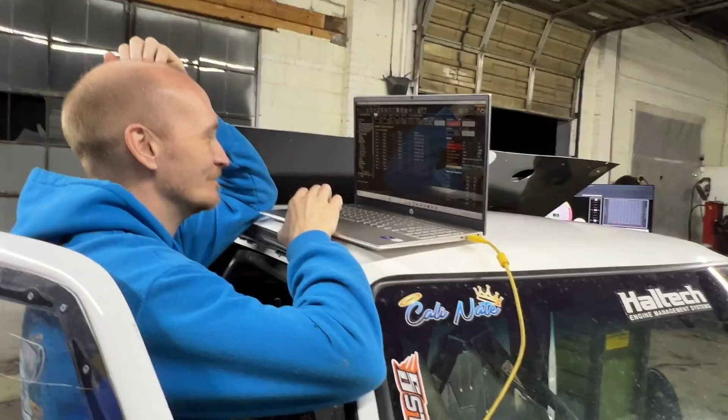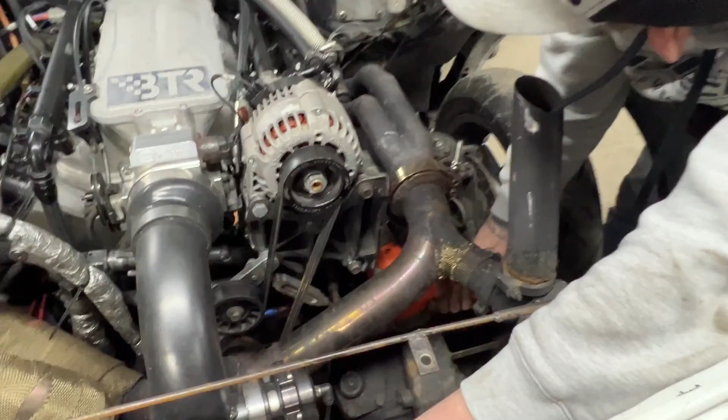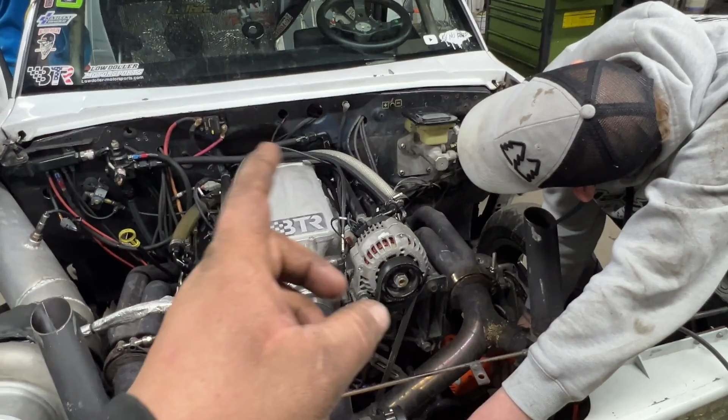So you can't tune if you don't know what hole is what hole. You gotta know your holes. Trust me. We got a heat gun on here, and we're just running down the line and verifying with what it changes over there, just to make sure, because a minute ago 1 and 8 were the only two that I had right, and I think these were flipped. 7 was 2, I think. I'm not for sure, but I had them all over the place. And you can't do a cylinder correction with temperature and with injectors, with the fueling, if you don't have it in the right spot.

With all that being said, we are at Carbon. We've got Brad down here and Corey. Steven will be here shortly. I know y'all have seen Austin before. We've got new EGTs on it. We got the new injectors in it. We've got basically a whole new truck again.

Same headlights. Got the same headlights and the same busted windshield. It's cracked right there. All the way. Yeah. Yep. Clay City, Kentucky Dragway. Every time I go down there, I tear something up. So hopefully that's behind us by now.

So, anyways, we are hopefully going to make power tonight. Big power. So stick around for that. We've made one short pull on wastegate and didn't even make the recording on the dyno. That was my fault. I didn't hit the button, and I thought I did. But that also showed us that we needed to verify the EGTs for what hole is what.

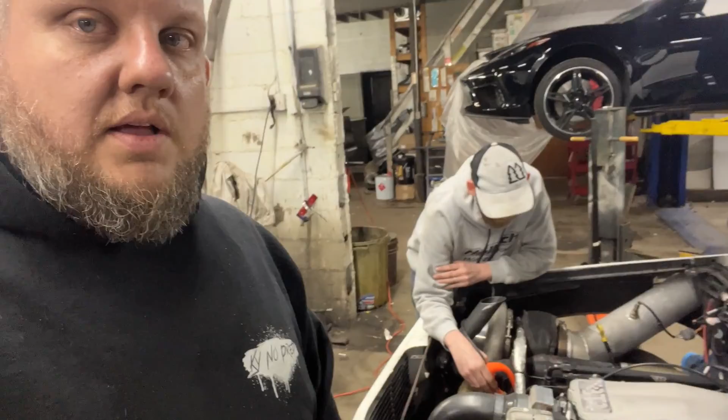Now we can really do the corrections that we need to do and make the power that we want to make. I'm not going to tell you what we're going to shoot for, but it is north of where we've made before. I know what I want to see. We all know what we want to see happen tonight, but we're not going to put numbers out there yet until it happens. We're gonna let Corey do his thing with Brad, and we'll get right at it.

We've done some cylinder corrections by now. We've been on 4 pounds, I think is what it is. We've made like 450, something in that range. We're gonna rev it on up a little bit. We've got it on a 10-pound target. It may be 8 pounds, maybe 11. We'll figure that out after this pull. But cylinder corrections and a 10-pound target is where we're at. Let's get it.

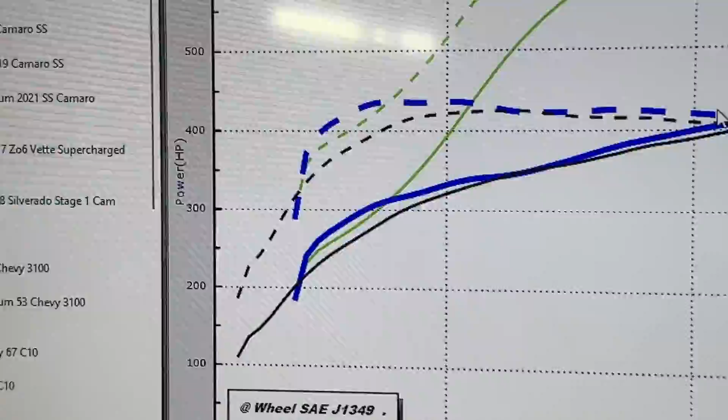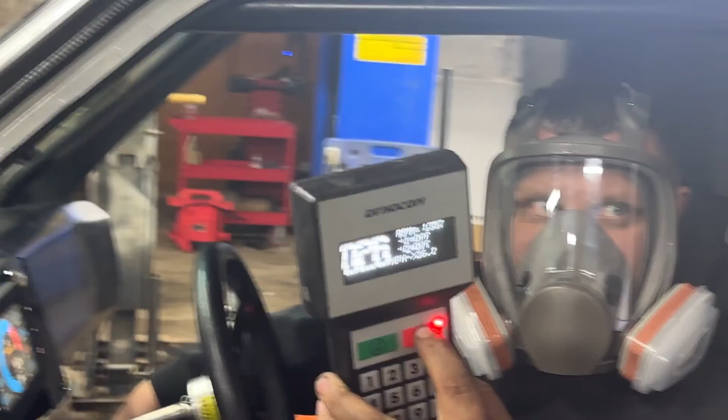So we're happy with it. It's picking up fairly good. We done a little bit more fueling change. Did we add any more timing or no? No, we didn't add any more timing, right, Brad? Brad, he's not paying attention. Do we add any more timing? No. Just fuel, right? Yeah, just fuel correction, fuel boost. So it should be on 15 pounds this run. 15 pounds it is. I know you won't even look at it.

So we went up boost, we got a 15-pound target, so we're hoping that everything is linear, and it makes right at 15. We got a new plug on the hottest cylinder, so we're going to pull that plug after this run. We're going to show you guys what about 15 pounds does, and whatever power it makes, we'll let you know that too. Go.

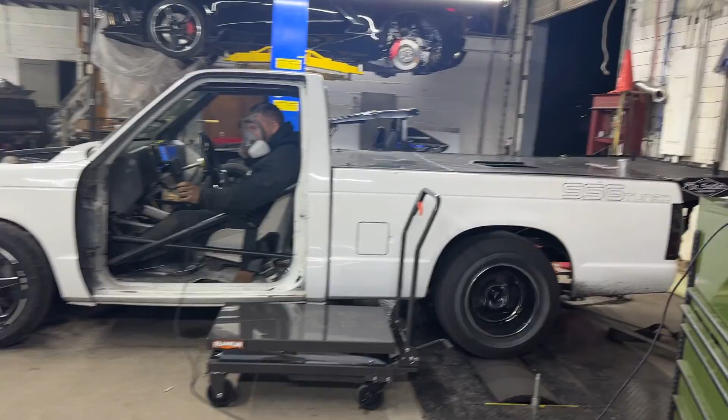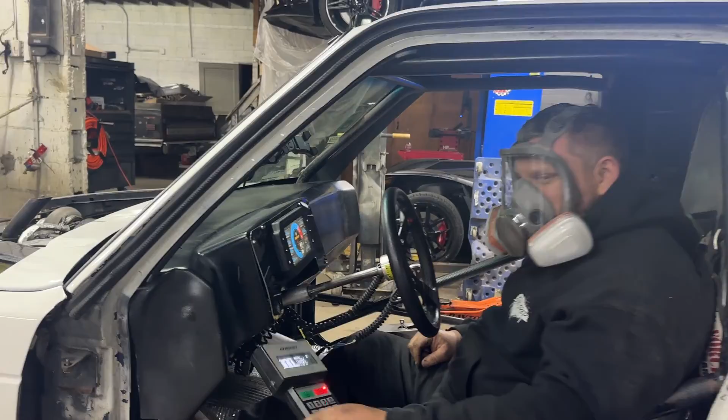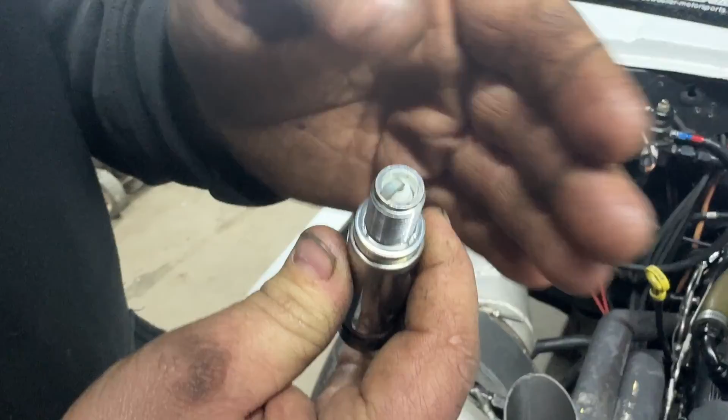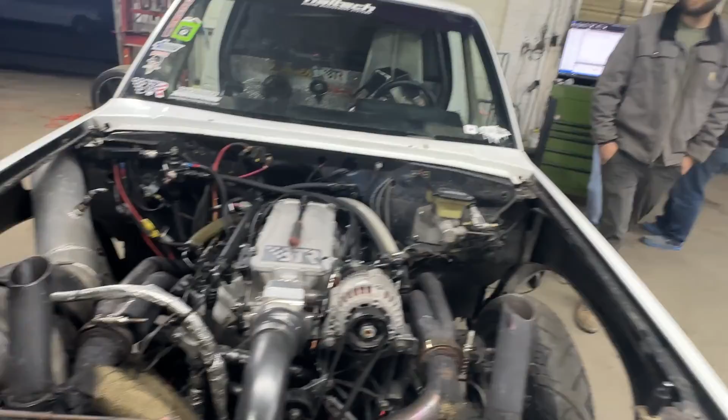So I haven't myself even looked to see how much power it made. First thing I did was look at the plug. I don't know if y'all can see that. Is it focused? Yeah. So that was just one pull, and obviously the timing's safe, fueling's safe. It isn't hot enough to even burn all the cadmium off or anything yet. So we're super happy with that. You can see, if you know what you're looking at, it's fine. Now you can go over there and see what power it made, what boost it made. Swap out that O2 again. Still a little bit cold on one.

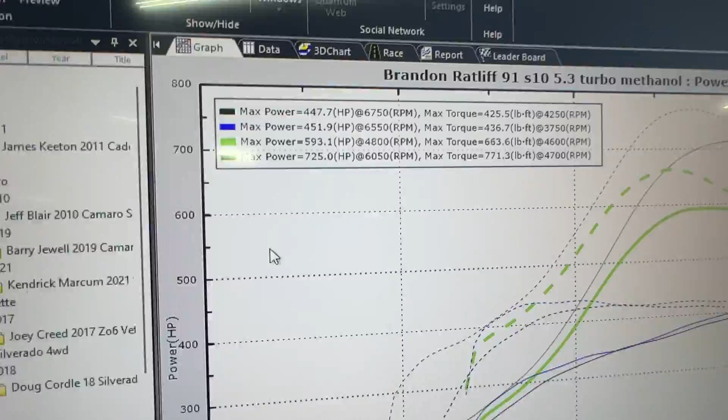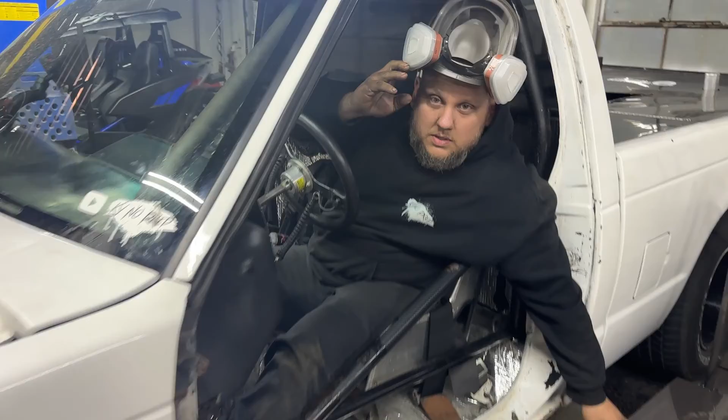All right. So we are going on up to 20 pounds. We still have like 8 degrees of timing pulled out from where we know we were before. The timing looks great at the power level we're at. We're going to run 20 pounds, see what it makes, look at that plug, and then we're going to start trickling the timing back in it from here and see where we need to go. We know we can add more timing, we just don't know how much. We're going to watch the power trend throughout the next few pulls to figure out where we need to stop and be safe. You got anything you want to say?

Yep. We're also on NGK 10s this time. I think when we were here last time, we were on 8s, right? Yeah, we were on the NGK 8 the last time we were here. So we're on new plugs. It's on 10s instead of 8s. And yeah, everything else has changed, so why not change all that too? Yeah, we've changed it all. So, yeah, let's get it.

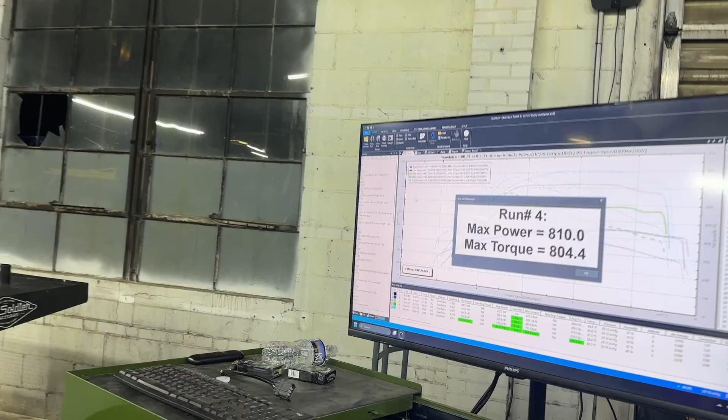And 804. 810, 804. No. How do you feel here? You're not good? Yeah. Sounds good.

So what we're going to try to do is same boost. So we're going to try to stick around 20 pounds. Probably going to add about 100 degrees worth of temperature to the EGTs and see what kind of power that picks up. I would expect 50 horsepower or something like that, about every 100. But we'll try it to see how it goes. Sounds good.

Timing up top only, around 6,000 up in that range. Yeah. We pulled 2.5% of fuel out of it as well, trying to clean that up. We did gain almost 100 degrees EGTs. Plugs look good so far. We got another plug in number 1. We're gonna read that one after this pull.

What was the power in the last pull? It gained 70 horsepower with about a 75 or 80 degree average gain all over. Okay. So we're trying to gain that much more temperature while cleaning the fuel up at the same time. So if this works out, on the same boost we'll pick up another 70 or 80 horsepower. Yeah. Give or take. Or 50. All right, let's get it. Yep.

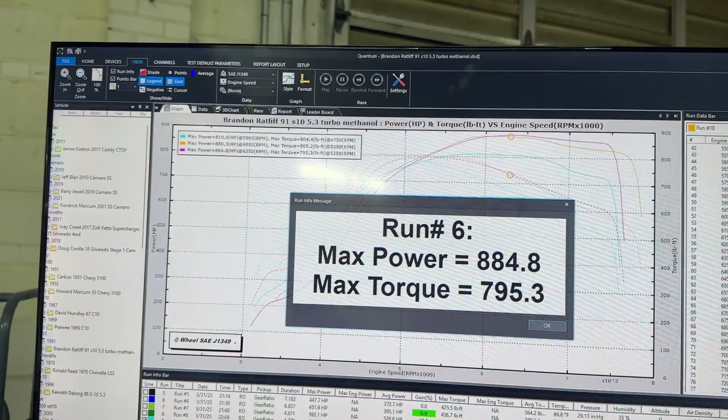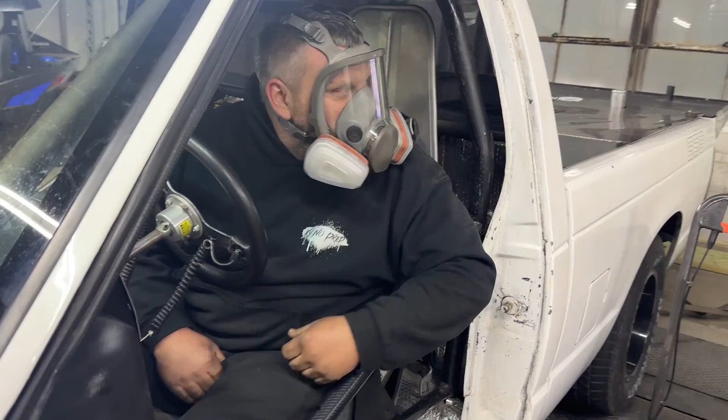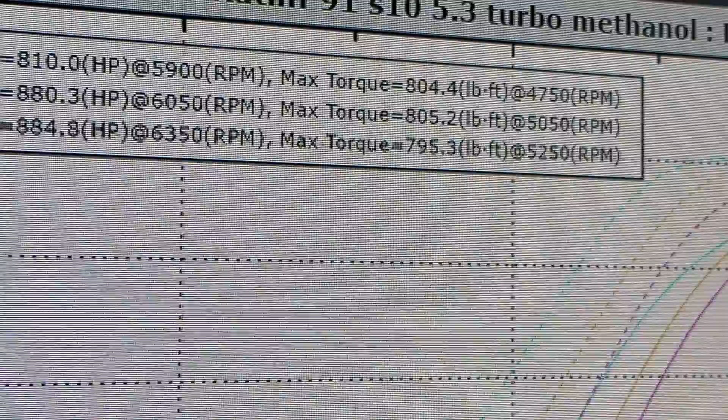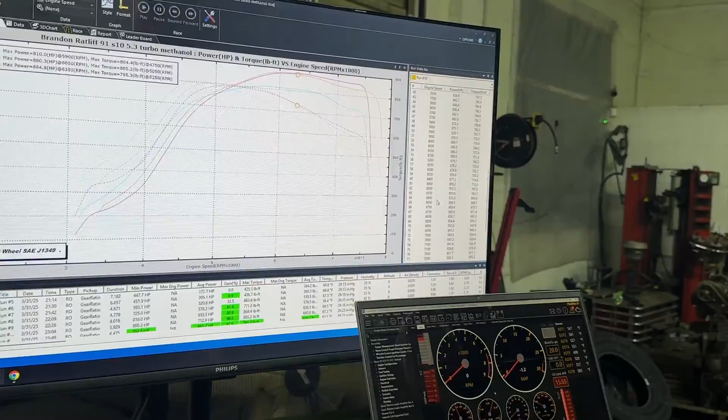That was a good pull. 884, I think. Run, Corey. Looks good. Nothing flat. Sweet.

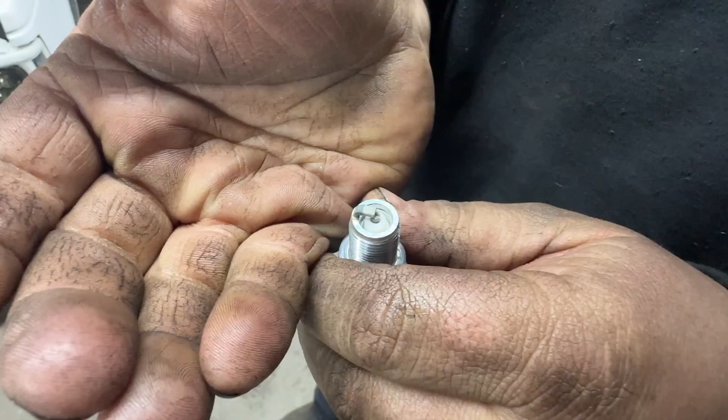So this is number 1. Been at 370, 380 on mine. I don't know if it's focusing for you. Quit moving. Oh, it looks good. It's great. There's really nothing burnt, nothing like that. Timing mark's still safe. Fueling down there looks great. This was number 1, which was still a coated cylinder. Here, let's go over and look at it exactly.

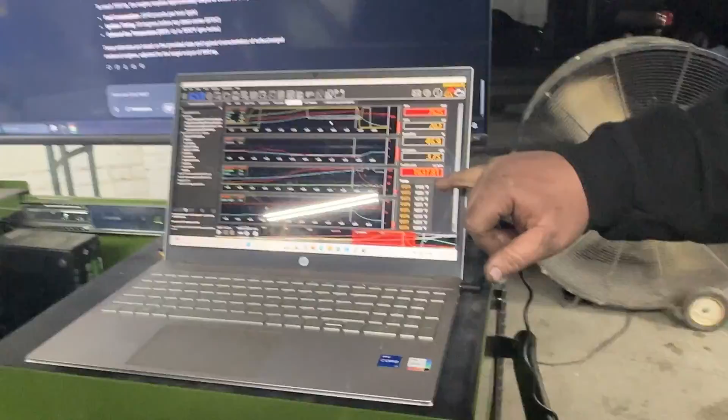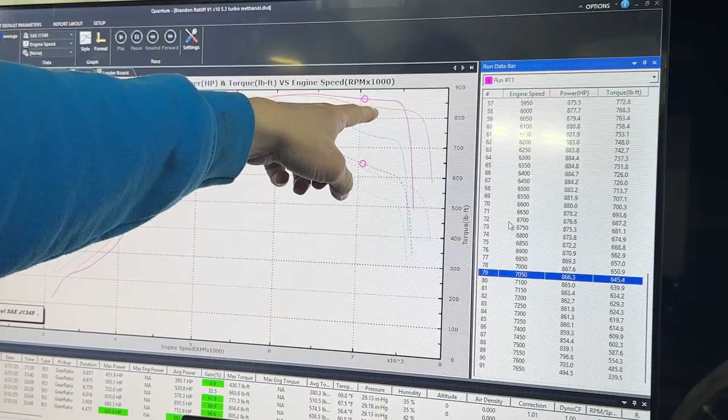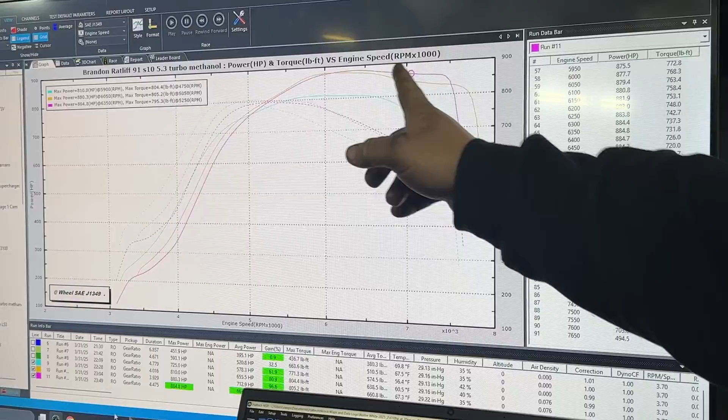But what we didn't tell you yet was when we added the 1 degree of timing, it also knocked a pound of boost out of it. Anytime you add timing and the boost lowers, it's getting happier. If we add timing and it doesn't drop boost, that's when you really got to start worrying. Picked up 50 at the end. So it picked up 50 horsepower.

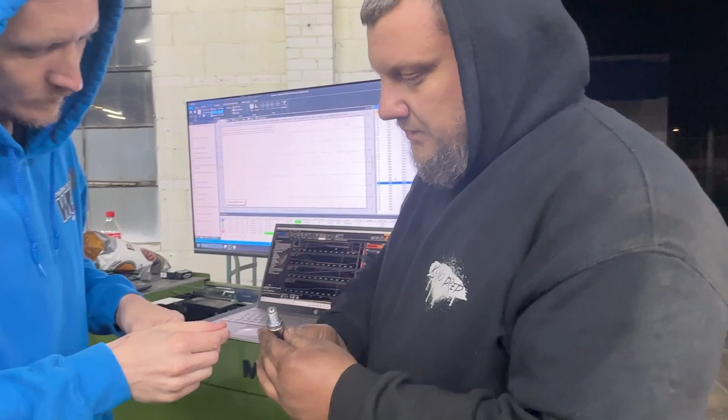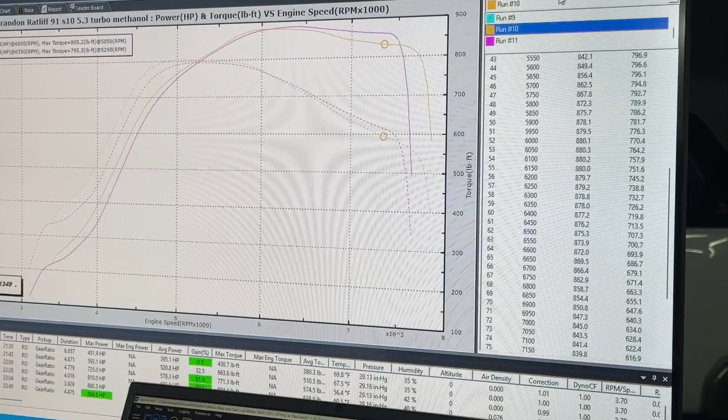Is that 8 still? This is number 1. Oh, that's 1? This is 1. Yeah, we're safe. So it picked up 20 then. Because we went from basically 870 to 880. No, we're actually from more than that, eh? He's computing. 845. No, let's look at 7700. Let's see now on here.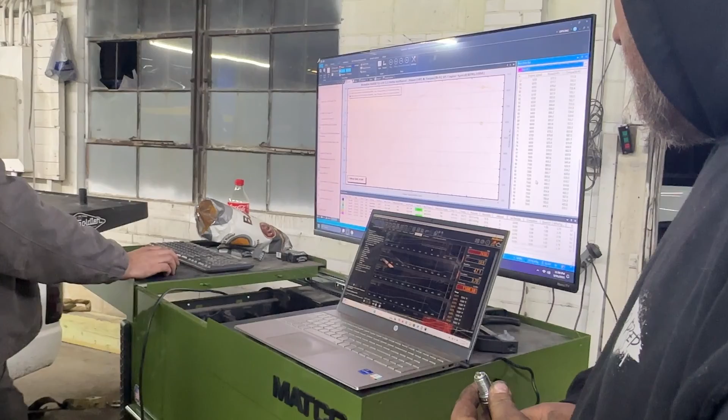That's where it made its biggest gap. So 7350 at 831, and 7350 at 860. So it picked up 30 wheel horsepower, and the only thing we did was 1 degree of timing, and we pulled a little bit of fuel out of it, which isn't a lot at all. Very little. We can still pull more fuel if we want. We can, yeah. We're still under 1,300.

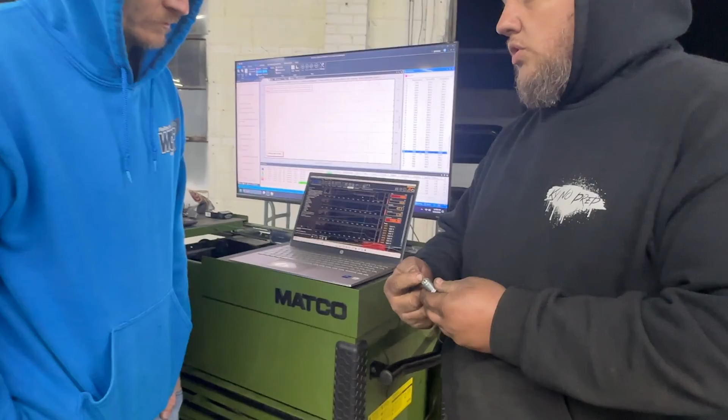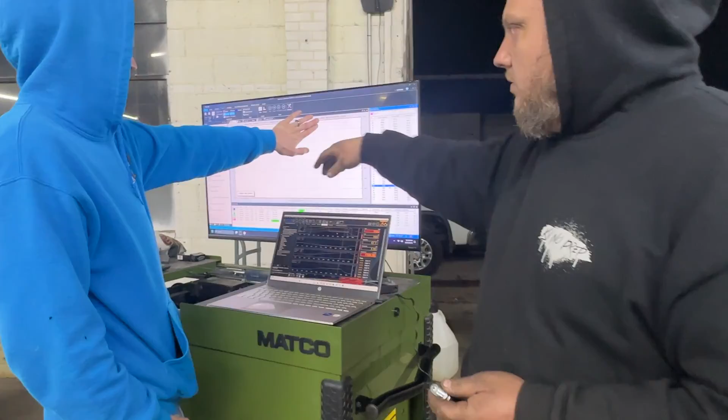I would like to see one more degree and see the change. Okay. If we don't change fuel and we do just the degree of timing, just let it eat it and see what it does. Yeah, I'm fine with that. That's what we're gonna do. One more degree, and we're probably still only gonna be working from here up. It's probably not going to do much here, and the peak numbers probably aren't going to be hugely different, but we're just trying to get this flat.

We're just cleaning it up, and then if we can get another good pull, I think we just slam another 5 pounds of boost in it. Yep. So we'll make another pull at this same boost, and add one more degree. Pull this plug again, and if it looks good, we might not even show you. We'll go straight to the 25 after that. So let's go.

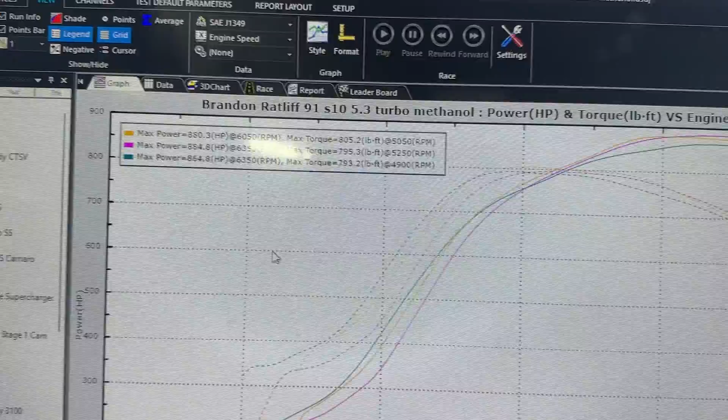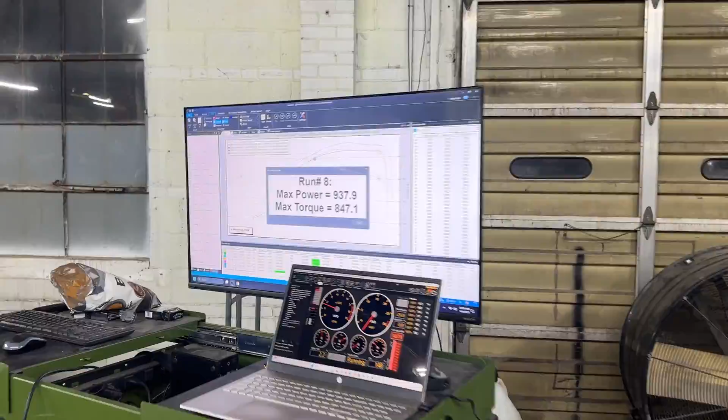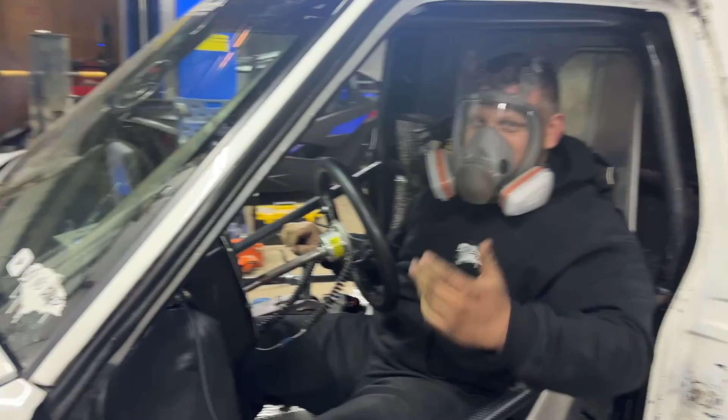So we added a little bit of fuel back. We took away one more degree of timing from where we were at because it didn't really like it. We're getting there. 937 and 847. Is it burning you out? No, no. So we're getting there. We'll let it cool down for just a second, pull them plugs, check the EGTs, check everything out. We may pull fuel, we may add fuel, we may play with the timing a little bit, and then depending on what happens now, we'll step it on up. So we're not done yet.

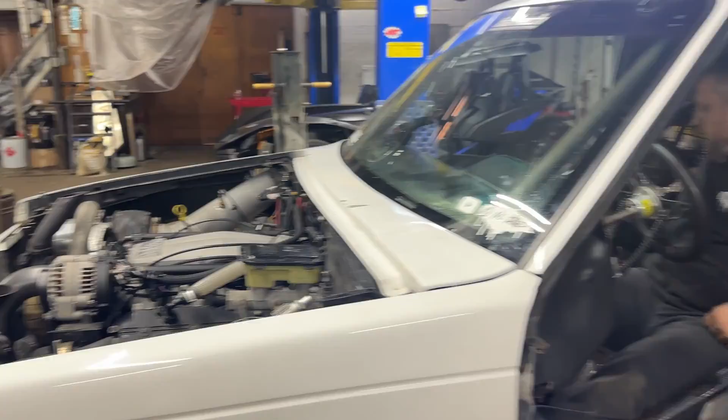What did it say, 28? It was actually not 25 pounds. Yeah, right there, 23 pound max. That's just on the log screen. He hasn't got all the data pulled up yet. He's chit chatting and nerding out over here. But it did make more power, obviously, with more boost. 23 pound max. Right there, we're at 937 going by, so 938 for max. He's going to pull this up and see if it was just a peak number, but it looks like a pretty good average. It did average a lot over the whole curve.

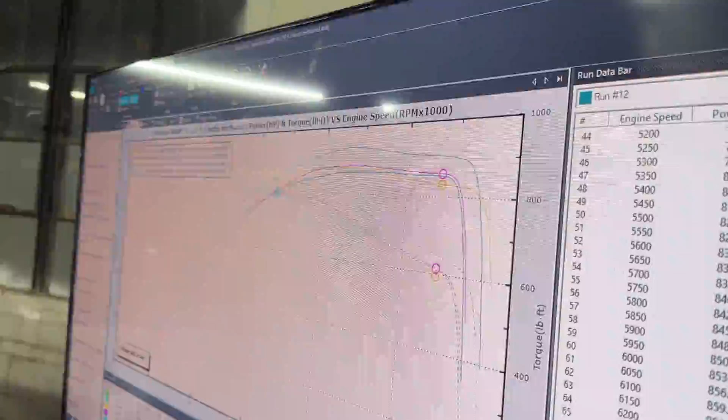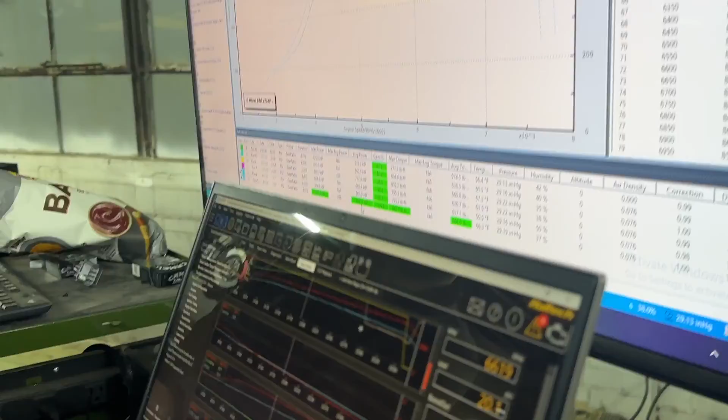That's a pretty good jump. Where's the average screen down here? Average about another 30 more horsepower, 60 more foot-pounds torque. Okay, and all the EGTs are between 1220, 1270, 1280 at the max. So we've got basically a 50-degree window. We know for a fact if we can take this thing to 1350, it will make a lot more power. It'll also be more on the ragged edge of blowing head gaskets and being very mean to it.

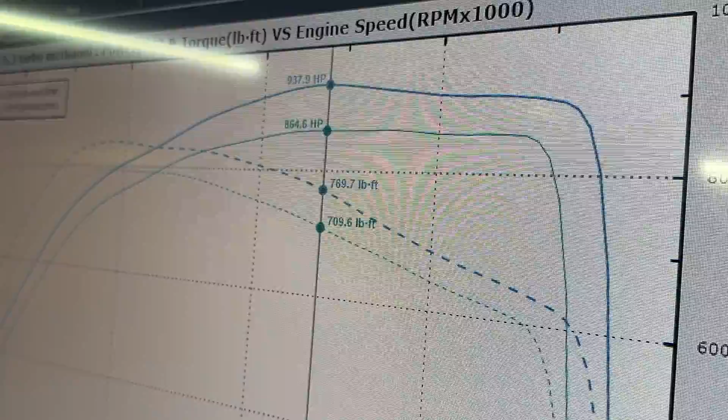I would rather it live at 1,000 to 1,100 all year long than to come out here and be a dyno queen and make 11 something or 12, which I want it to do, but I would rather it make a good strong average and live forever than throw a giant number on the screen and blow up tomorrow. He's got an average pulled up right quick. So we're still nerding out over here. These guys, they're all about their data. They got more stuff here than we could even talk about, honestly, going on behind this screen.

What is the next move, Brad? What do you want to do? Well, basically from here, we'll pull the plugs, just peek at them real quick. We know the temperatures on all of them, but I want to look at the timing number at that boost. We need to go in and add some duty cycle and boost control and see if we can get it to jam on up. We need to get that other 2 pound in order to make the 25 we were looking for.

Yeah, because that was 20 at 6,500, and then 23 when it revved out to 7,500. So at peak power, it was only on 20 pounds, and the 23 on out the back didn't trend high. So we just need to throw some more at it. Throw duty cycle at it, and we'll pull this plug, make sure the timing still looks happy with an extra pound or two. And we'll get at it with another pull at hopefully 25 pounds on the next one. See you in a minute.

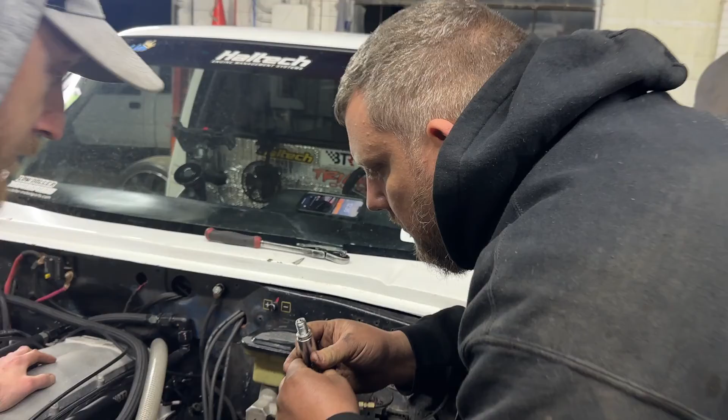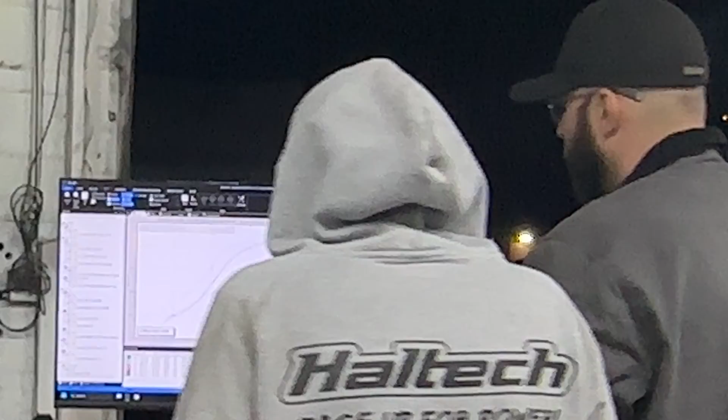What we got? That is beautiful. Barely getting a little color, about a third of the plug. Fuel ring down there looks beautiful. Just right at the top of the bend. I'm completely satisfied with that. It's perfect. Safe, still good and safe. Number 1 and number 8 should look the same. And number 1 and number 8 are the furthest apart from each other on what they want.

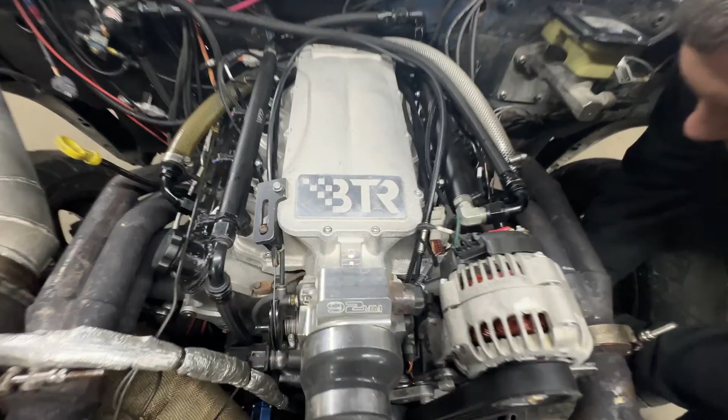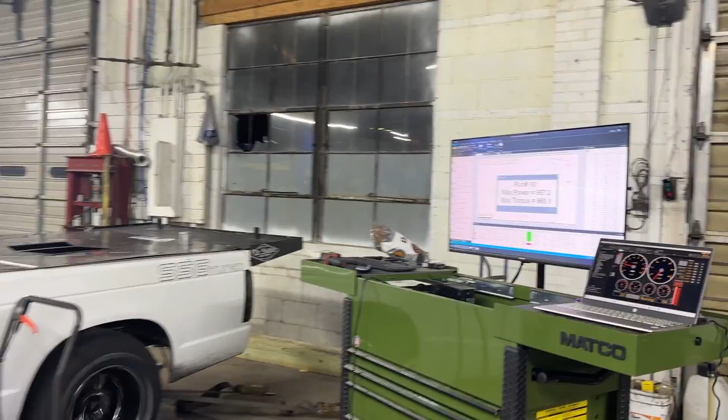So yeah, we're gonna throw that one back in there and just try to make the 25 pounds. Let's get it. No, this thing only went to 136 degrees. So he's saving that log right now, and we still didn't make the 25 pounds. We're messing with the hold on the dyno to try to achieve it. Same again. Identical, same boost. 22 pounds. That's just what it is. Yeah. So we're at 100% duty cycle.

I don't run onboard air, and I don't run CO2. I just run manifold air because I don't like failure points. If I want to make more than this with what we have and the way we have it tuned right now, then I'm going to have to add spring, which we do not want to do because we've been down that road, or we can add CO2 or onboard air. I don't like adding extra features to the truck.

I like simplicity. We can achieve more power just cleaning up the tune a little more, or we can leave it here and race the truck and be happy with it and learn how to race with this new gear and set the truck up the way we used to race it. We're probably going to call it quits right now. The air fuel is still fat. You know, I'd say it's happy. We'll just call it happy.

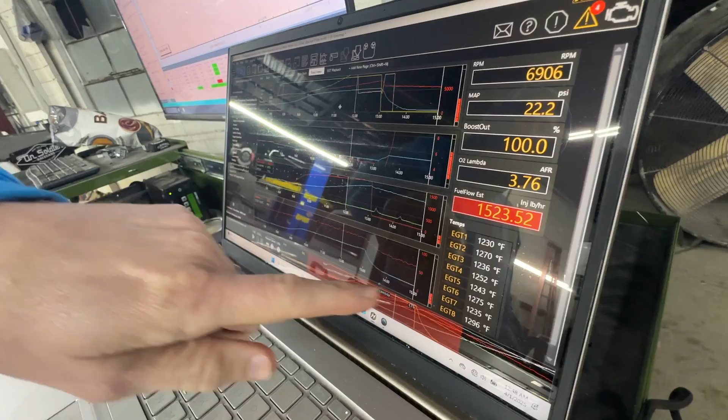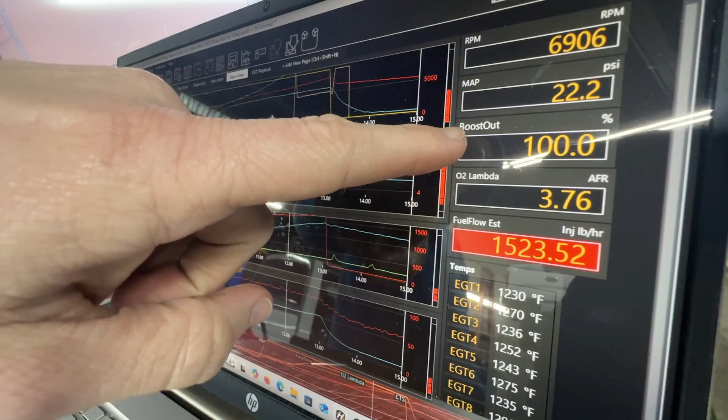Temperatures are still within the 1200s. Yeah, within the threshold that we want to have them at. Yep. We know because we just did it earlier. Yeah, we're boosted out. That's the boost controller. That's all it has. So what was that power run there? That was 960. Yep, 957 and 960. Got 960 torque. Why is that zoomed like that? That's just the way it held. That's where it held. Oh, okay, that's what changed it. We were trying to hold.

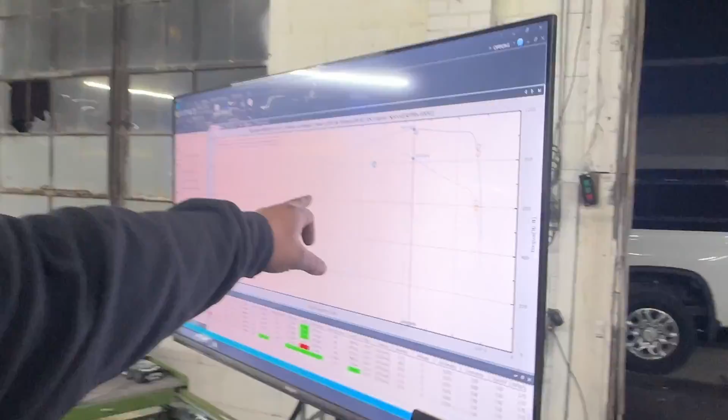So if you look though, what we love, and a lot of people don't really know this if you're at the house sitting on your couch, but when you see a boost curve or a horsepower curve that comes up, spikes and falls over, that's a hero pass. This thing is making massive power forever. This isn't your dyno queen where it makes 1,000 and falls. We're making massive amounts of power. The average power in this thing is incredible, which is why the truck is so fast.

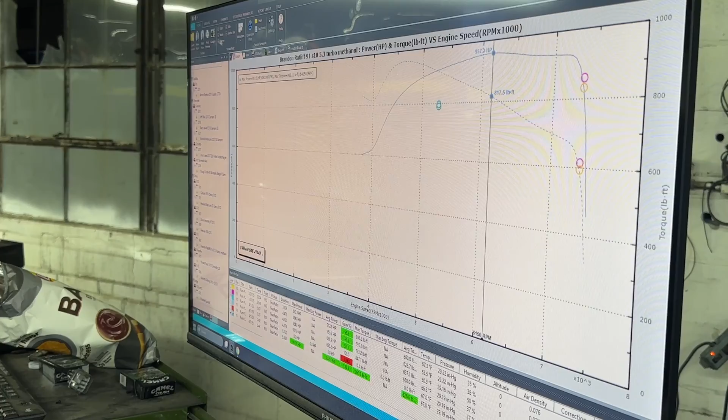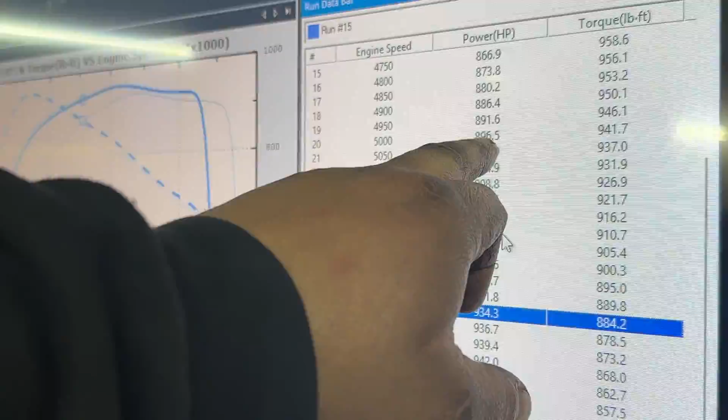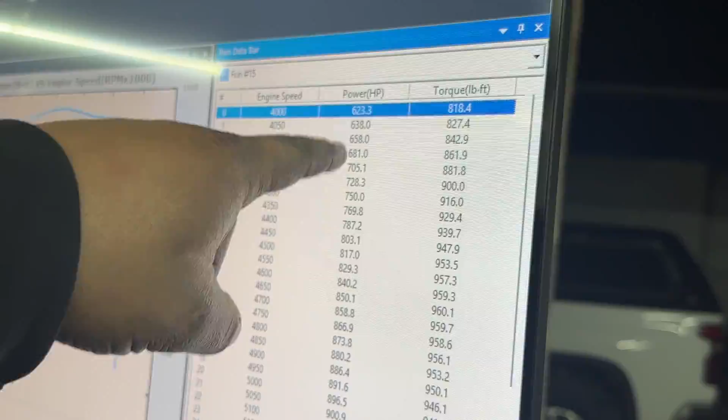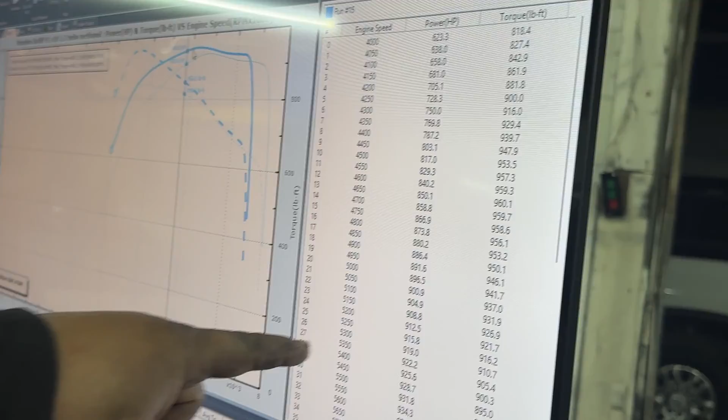So, okay, it even gives you a full sweep. Yeah, so at 5,000 RPM, we are making 900 horsepower. Go on back, scroll up to 4,000. This is why the truck is fast as shit. 4,000 on. This truck makes such a great average amount of power. If you have to pedal it and you have to fall back down into this range and get back in it for any reason, that is how you can drive back around somebody. So we're gonna call it quits there.

I have not made a pass in this truck in a while. I've got to set this anti-roll bar up that Jason from 10 Soldiers sent me. It's on there. I just have to adjust it and get that stuff right. We want this thing, if it wheelies, to go dead straight.

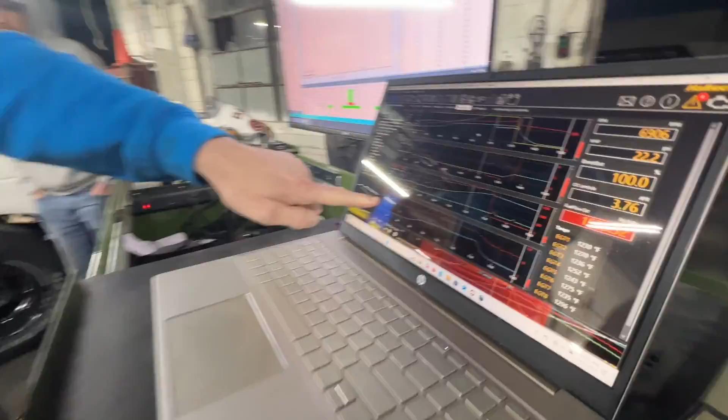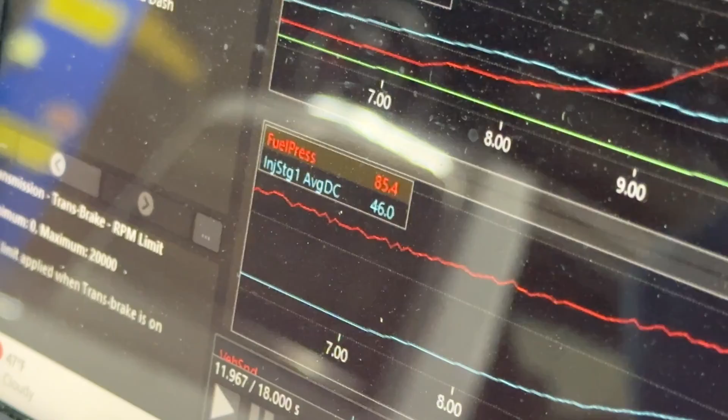BTR, the intake, that hit every spot. Brandon Carter, the injectors, you're nailing it. These things are great atomizers. They're doing everything we want. The duty cycle is what, 50%? Not even. Right under. Where are we at on here? 46% injector duty cycle. We've got so much more left in this thing. And that's on pretty low pressure for those. That's just 85 pounds. Yeah. We're being conservative.